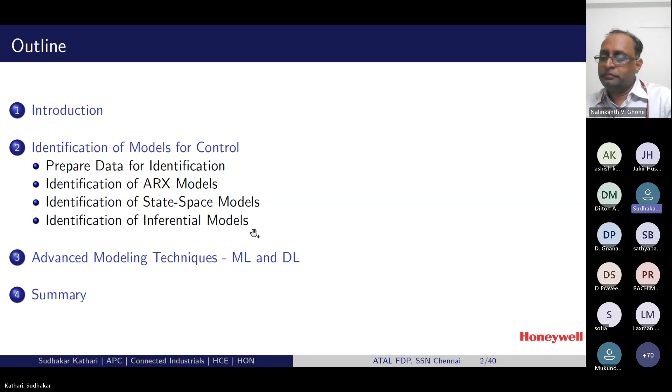The outline of the talk is as follows. First, I will introduce 3 different use cases of models. Then I talk about identification, where we will see the identification of 3 different models. And finally, I talk about machine learning and deep learning based modeling techniques, focusing especially on inferential applications in advanced process control.

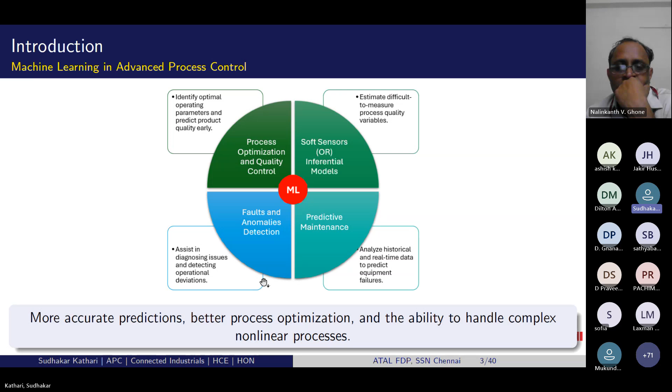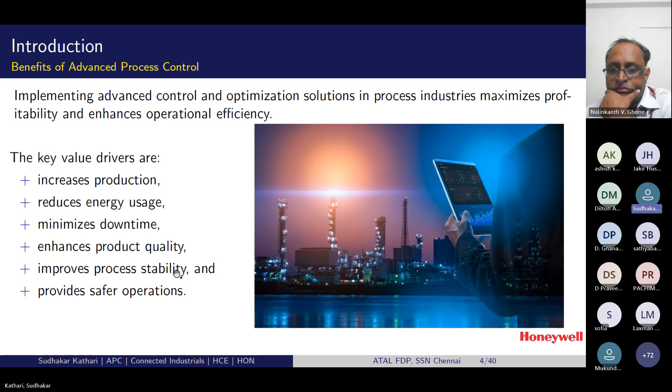If you talk about advanced process control, there are numerous benefits of implementing control and optimization solutions in process industries, including significant cost savings. Advanced process control solutions enhance operational efficiency, reduce energy usage, maximize profitability, and provide safe operations. These factors and key value drivers motivate process industries to adapt APC solutions in their plants.

The most common control strategy even today used in industries is proportional integral derivative control, a feedback single variable control. The output from the PID controller is a weighted sum of 3 factors: the error signal, typically the difference between the set point and the process variable, that is SP minus PV; the integration of the error; and the derivative, or rate of change, of the error.

For example, consider a tank system with a liquid. The objective is to maintain the temperature of the liquid at a particular value, known as the set point or SP. The temperature PID controller continuously reads the output temperature of the liquid and calculates the error, which is SP minus PV, and generates a control signal, which is the output from the controller. In industry, we use the notation OP. It generates this OP accordingly to maintain the temperature at the desired level.

The key step here is adjusting the weights, or tuning the PID parameters, according to the process conditions. There are different tuning methods based on process parameters. The typical process parameters are gain, time constant, and delay.

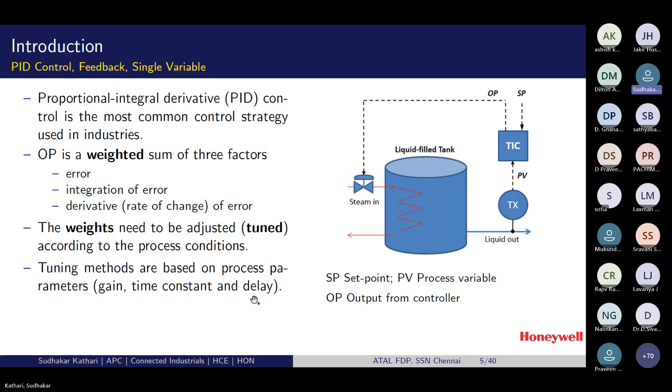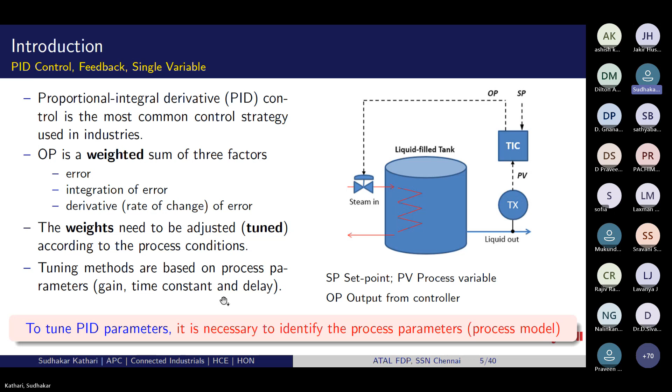So in order to tune the PID parameters or the weights of the PID controller, it is necessary to identify the process parameters. That means it is necessary to identify the process model, so that with the help of the model we capture the process dynamics. Once we get the process dynamics and the process model with the help of gain, time constant, and delay, there are different methods to adjust these weights.

Although the PID controller is the most commonly used control strategy, it has a few limitations. If you have a process and you step the input some value, the process will not start responding immediately. It will respond after some time. So that means the process may have some delay.

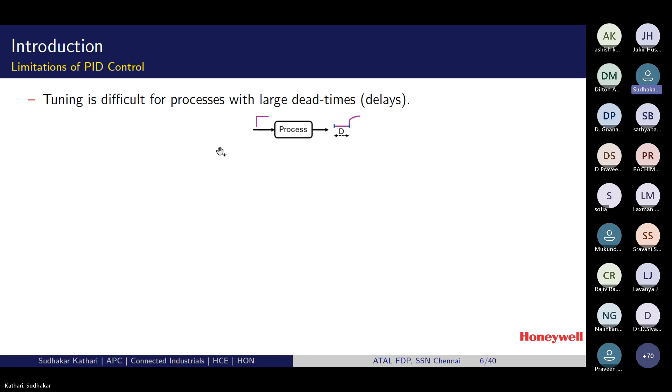If you talk about process industries, for example in oil and gas at refineries, you have larger pipes that connect the columns. So typically the delay could be in terms of minutes. It can go to some hours, 60 minutes or 2 hours, sometimes 120 minutes if it's a larger pipe connecting the column. So with the PID controller, it is difficult to tune the PID parameter for a process with large time delays, or we generally call it dead times.

The other limitation of the PID controller is difficulty handling or controlling a process with inverse response or unusual dynamics. The inverse response is when you step the process, it starts responding in the opposite direction to the normal behavior for some time, and then it starts responding as per the normal behavior. This is typically the inverse response, and it is difficult to control such processes with a PID controller.

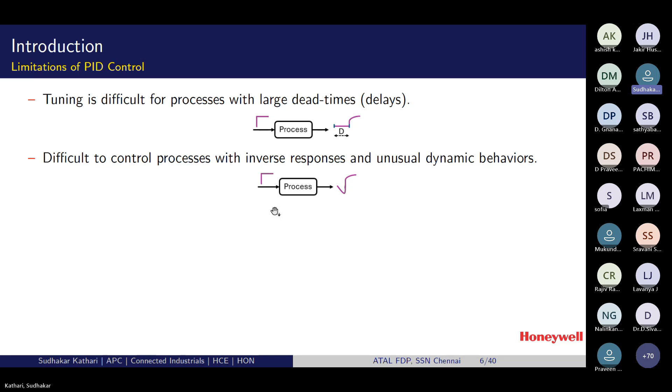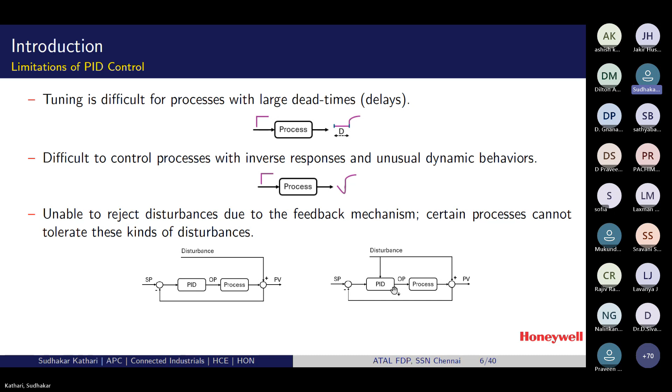The third limitation of the PID controller is it is unable to reject disturbances due to the feedback mechanism, as the disturbance is addressed only after the control action is taken. If you see here, the disturbance is added to the PV after the control action is taken. But ideally, we expect a feed forward kind of disturbance rejection, so before taking the control action, we account for the disturbance so that it can reject the disturbances.

The fourth and important limitation of the PID controller is it is unable to handle interactions, where many OPs can affect many PVs, when you have multiple control loops. It is also unable to handle constraints. So if you take a plant, we may need to minimize certain utility and maximize certain product.

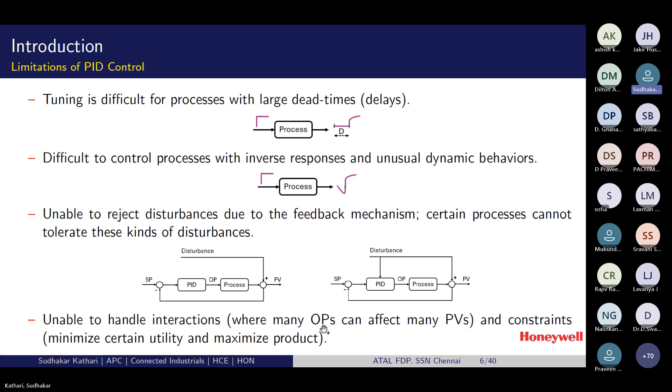To address these limitations, industries have adopted MPC based, that is model predictive control based, advanced process control strategies, which is typically above the PID control level. The basic four elements of MPC are: you need to specify the reference trajectory, and based on the reference trajectory and the dynamic model of the process or plant, it generates the prediction of the process output.

According to the reference trajectory and predicted process output, and with the given constraints, it tries to compute or generate the optimal movements in the inputs, such that it minimizes the error between the actual and the predicted output. So to implement these MPC-based advanced control solutions, it is necessary to identify the process dynamic model between the process inputs and outputs. This is another use case of model in process control, typically in the form of MIMO, multi-input multiple-output model.

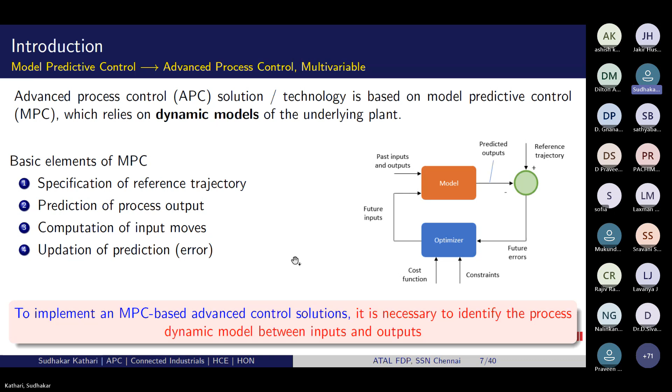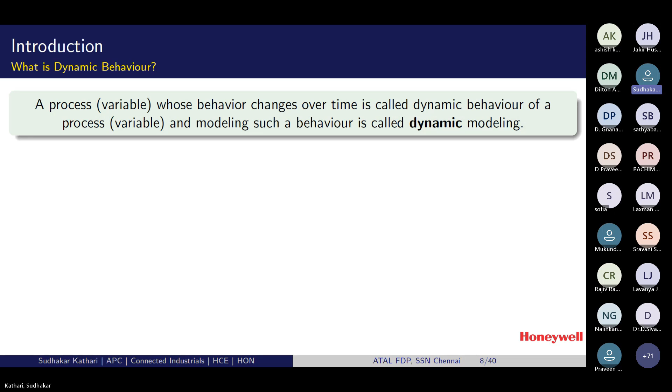So here we're talking about dynamic models. The MPC and PID controllers both completely rely on dynamic models. So what is a dynamic model and how do we incorporate it? A process variable whose behavior changes over time is called the typical dynamic behavior of a process, and we need to model such kind of behavior. We call that kind of modeling dynamic modeling.

So how do we incorporate the dynamics? For example, let's consider the inputs here: we have inputs U1 to UM, and the output is Y, considering only one output and multiple inputs case. This is a typical mathematical model that represents inputs and outputs in a static manner. If you see the expression, there is no time factor here, whereas dynamics means we need to bring in the time factor.

So the behavior of the process over that time. There are two ways we can incorporate the time factor, or the dynamics, in the mathematical model. One is dynamics in the input variables. Generally the output depends on the past inputs, so you need to bring the lag terms of the inputs. U1 runs from K minus 0 to K minus P according to the process order. Similarly U2 for the second input, and similarly for the mth input. So this is how we can bring the dynamics in the inputs.

So what is the effect of your output over the changes in the input over a particular period, starting from now. Standing at now, you can apply the last 1 hour, 2 hours, 3 hours, depending on your process conditions. That much past you have to go back and apply to see the effect of the past inputs on your output. That is how we capture the dynamics due to input changes.

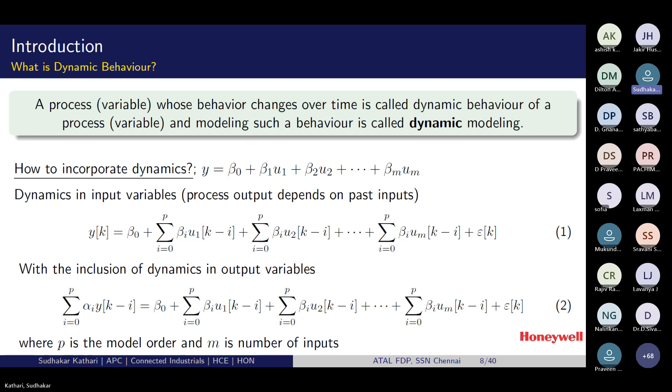So we have seen two use cases of models so far, and the third use case is measuring process quality variables. As I mentioned, one application of machine learning algorithms we recently adapted is the soft sensor inferential model. In a typical process industry, to implement any control and optimization solution, it is required to continuously measure the key process quality variables and properties, which are generally not possible to measure with physical sensors. For example, kerosene sulfur, product recovery, gas oil density, or Reid vapor pressure - these are typical process quality variables and properties.

So these kinds of process variables we can't measure continuously, that too according to the controller frequency. Typically the controller frequency could be 1 minute or 30 seconds depending on the process conditions, but it's not possible to measure these at that frequency. So the generic approach in typical industries is that the engineer collects available measurements of variables related to the particular process quality or property variable, and tries to bring some kind of mathematical relation to get that process quality or property variable.

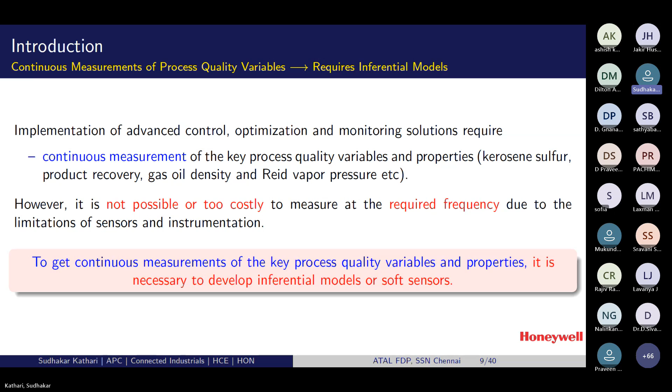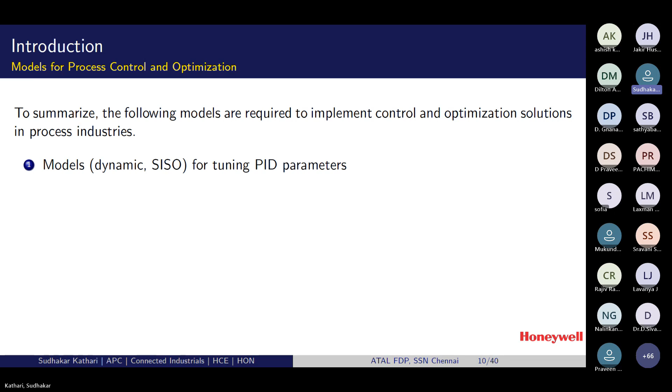So to summarize, three types of models are required to implement advanced process control and optimization solutions in process industries. One, models which are generally in dynamic form and SISO - single input, single output - for tuning PID parameters. The second use case is models which are again in dynamic form, especially in a MIMO structure, for implementing model-based advanced control and optimization solutions. And the third use case is models which can be either static or dynamic.

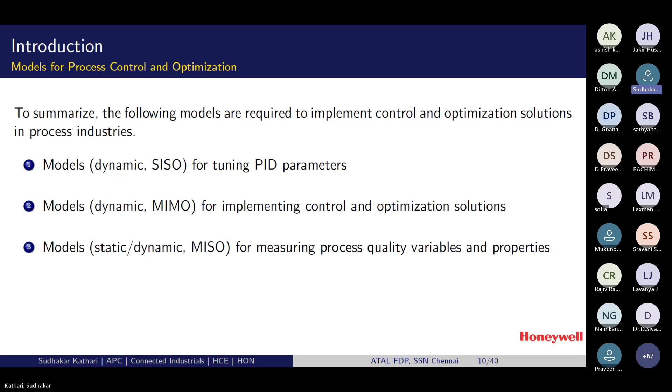If we talk about inferentials, sometimes the quality or property variables do not change with respect to time, so for certain cases a static model is sufficient. For other cases, we may require to incorporate dynamics to capture the behavior so that you get better accuracy of the model predictions. So the third use case is models either in static or dynamic form, specifically in MISO structure, for measuring process quality variables and properties, which we call soft sensors or inferentials. So there are three kinds of different models.

So how to identify these models? There are two approaches. One is the first principles approach, which uses physical laws and conservation equations. To build these first principle models, we require a good understanding of the physics of the process, which is rarely available for a large class of processes. Whereas the second, alternative approach is the data-driven approach, which uses experimental data. We perform experiments, collect the data, select a model structure, and estimate the parameters to try to capture the dynamics of the process with that model structure.

Identifying process models from measured data is one alternative. I have a natural question - can we integrate both these approaches into a single model? Yes, correct, we can integrate them.

If you have some prior knowledge about the process, you can bring that knowledge to build physics-based mathematical models, and also use experimental data. Both can be fed to the machine learning models together - it depends on how you plan to use it. If you know some information about the process, you can bring that into the model structure you're building from data. So that means you know a partial amount of the process, and the remaining portion you estimate from the data.

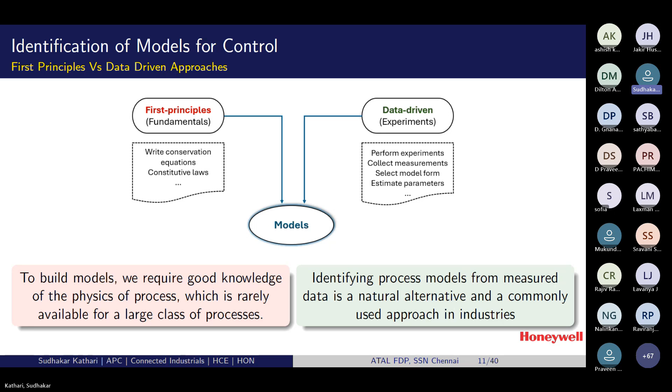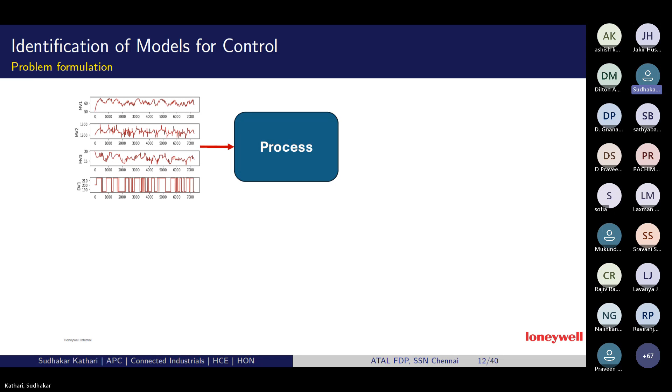The widely used and commonly used approach is the data driven approach. The identification problem in data driven approach is as follows: we have the process, we excite the process by stepping the inputs—this is typical in industries—then we measure the outputs. The inputs we call manipulated variables, represented as MVs, and the outputs we call control variables, represented as CV.

From this input and output data, we need to identify what are known as step response models. This is the step response model generally used in industries. However, it is difficult to obtain good step response models directly from the input and output data due to different reasons: noise, unmeasured disturbances, and the process may be running in closed loop.

Due to those reasons, we can't exactly get accurate step response models. So therefore, we first identify from the data a generic form of higher order models—could be in any form. Then we bring that generic form to a specific form, reduced order models, since we use lower order models for control. You can use any generic higher order model form to capture the dynamics as accurately as possible from the available data, and then approximate that higher order model to bring it to a specific reduced order form.

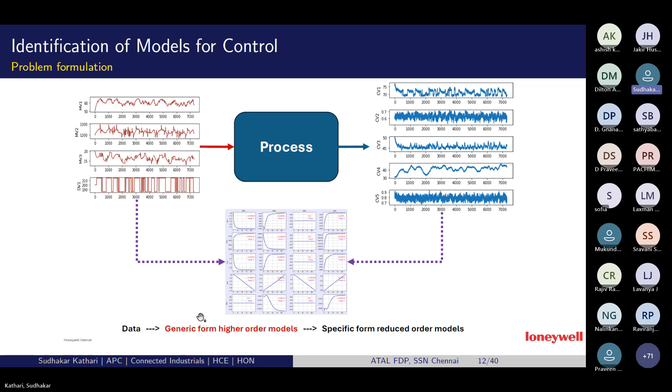So what are the typical model structures generally used for this generic form of higher order model identification? The model structures commonly used are the transfer function form and the state space form models. This is the general description of transfer function form models, especially in polynomial form, where y is the output of the process, u is the input, and ek is the noise.

Here B by F, in polynomial form, this is the plant model, and C by D, again in a ratio of polynomial form, is the disturbance model. If you observe here, A captures the dynamics common to both the plant and disturbance models. So depending on the polynomial values you assign for A, B, C, D, F, you arrive at different standard model structures that we use in process industries.

So these are the model structures. The FIR, a finite impulse response model structure—if you keep these things as ones, you need to identify only the B polynomial because all the remaining four are one. You just need to identify B, so you get what is known as a finite impulse response model.

That is one of the widely used model structures in industries that gives better results when the data is from open loop conditions. And the ARX model structure, autoregressive with exogenous inputs—these three are one, you need to identify only A and B, these two polynomials, from the data. And similarly, the ARMAX and OE, it is output error model structure, and Box-Jenkins.

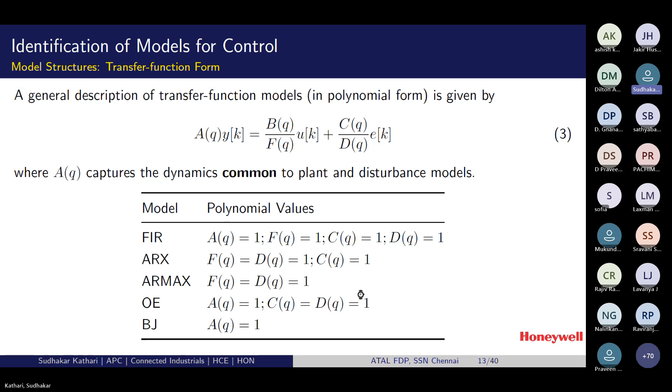The other model structure that is also widely used in process industry these days is a state space model structure. This is the general state space model form. You have the inputs U and output Y. You see another variable here, X, which we call the intermediate variable or state, which are generally hidden in the process.

For example, if you take a simple liquid level system, this is the input flow rate and output flow rate. These two are measured. If you consider the rate of change of volume, dV by dt, this we generally don't measure. That is the state of this liquid level system, which is generally a hidden variable. If any state is being observed or measured, that becomes an output.

So these are the matrices. Many might know these as the state, input, output, and direct feed-through matrices. Here the objective is to identify the state space matrices A, B, C, D that capture your process dynamics. Although we identify the state space model form, from the user perspective...

Typically the engineers are comfortable interpreting the models in transfer function form. So although we use the state space model structure internally, we need to bring it back to the transfer function form. You can use the mathematical relation that gives the relationship between the transfer function form and state space matrices to get the transfer function model. Once you get the transfer function model, that is generally shown to the user to interpret. So these are the two model structures.

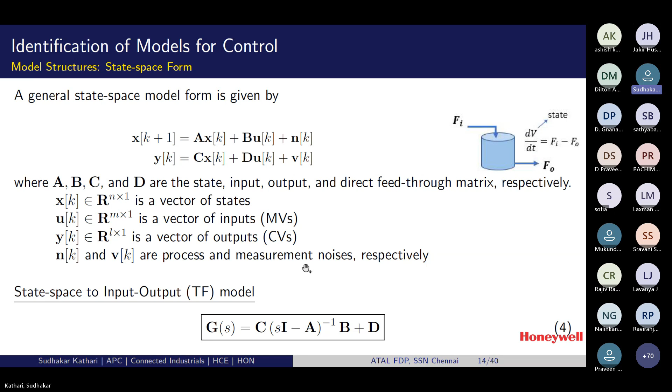Again, in the transfer function form, we have another category of different model structures. But before proceeding with identifying these model structures, we'll see what are the possible issues typically encountered with industrial data. These are the possible issues with industrial data that we need to handle before proceeding with the identification of the model.

Oversampling: if the data is sampled faster than needed during the step test, which the operator or engineer performs, this faster sampling leads to larger data length, which increases the computational time during identification.

And the offsets and different engineering units. Offsets are nothing but non-zero means, and identification algorithms are sensitive to these non-zero means and units. So we need to handle such things as well.

Drifts, trends, and disturbances all affect model accuracy, including unmeasured disturbances. Disturbances can be non-stationary, showing some kind of random walk behavior. So we need to handle such things as well. This is with respect to the data.

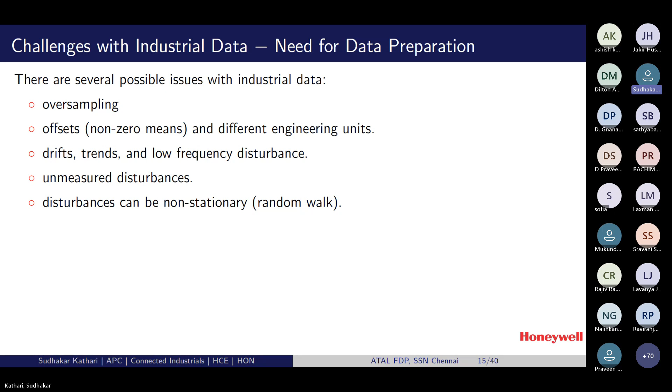If you consider the process itself, you may have large and different input-output delays, that is dead time, or integrating type dynamics. All these issues we need to handle, otherwise they can affect the efficacy of any identification algorithm used to identify the model structures we just went through. So to handle this, we need suitable data preparation before identification.

The issue of oversampling we generally handle through data resampling, that is, decreasing the sampling rate by a user-specified integer factor. Data scaling takes care of offsets and different engineering units through data scaling. Drifts, trends, low frequency disturbances, and other unmeasured non-stationary disturbances we generally remove using an appropriate pre-filter, then proceed with the modeling.

Similarly, for special dynamics with large input delays, we estimate the delays between input and output and remove those delays as part of pre-processing, then do the identification. For integrating type dynamics, we difference the integrated type outputs. Once differenced, it becomes a self-regulating stable CV. Then we do the model identification and add a pure integrator as a post-step.

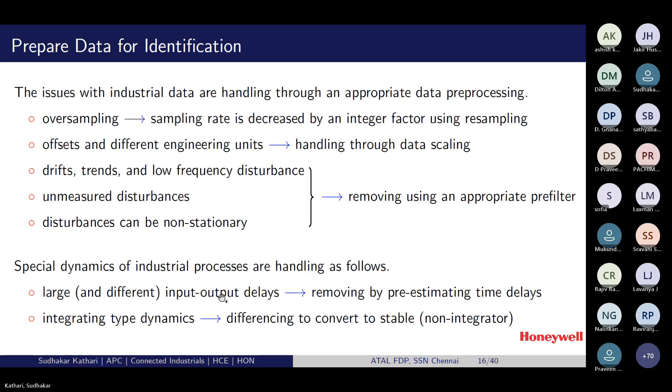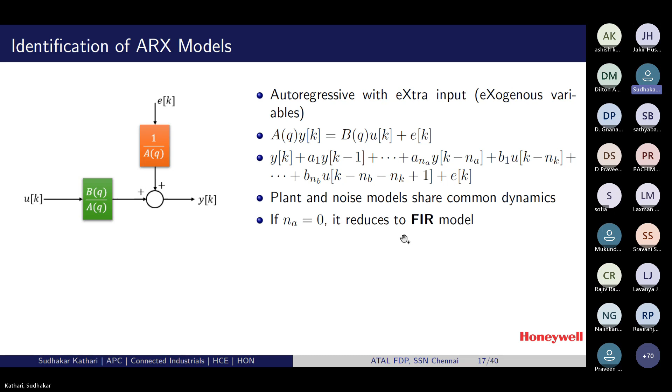If you see here, both the plant and noise model share common dynamics—A is common. Suppose if you make NA as 0, then it reduces to an FIR model. So both FIR and ARX can be identified using the least squares approach.

If you write the predictor for YK in terms of all lagged variables, you have unknowns. So it's a linear relation in terms of unknowns, and you can use least squares.

The problem formulation is: you have n measurements of input and output data of an unknown process. We need to identify the orders NA and NB of the polynomials and the delay.

Generally in the practical approach, we can't directly derive that order. So we have to try different orders, keeping some maximum order based on initial idea. For every order, you evaluate the loss function, and we pick the order which gives the minimum loss function.

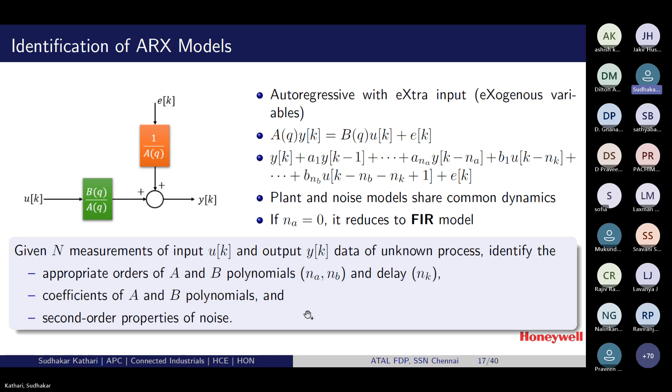Then we need to identify the coefficients of the A and B polynomials, and the second order properties of noise—that means the variance-covariance matrix of the noise.

As I mentioned, the predictor is linear in terms of unknowns. For the ARX model, the unknowns are A1 to AN and B1 to BN, and the knowns—also called regressors—are the past terms of both input and output. If it's an FIR model, you have only the past terms of inputs, and similarly the parameters B1 to BN.

We have a unique analytical solution: Phi transpose Phi inverse, Phi transpose Y. Using this least squares algorithm, you can identify the FIR and ARX models.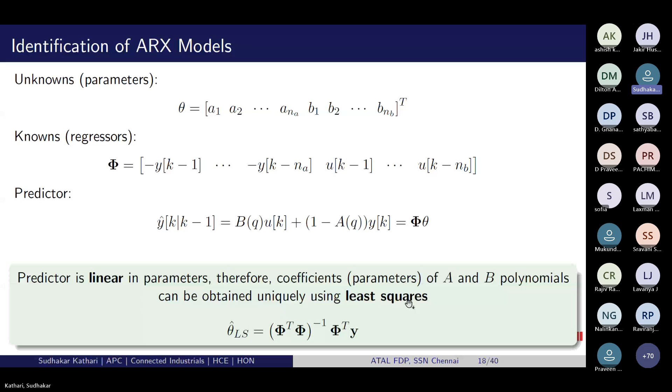We need to identify the model between OP and PV for a PID controller tuning. Each PID controller is a single variable controller, so we need to identify a dynamic SISO form of the model.

As I mentioned, as an intermediate step we use a higher order generic model structure, but at the final stage, for the end user, we need to bring it to a specific reduced order form. So we need to do some kind of curve fitting to approximate this higher order model's step response to a reduced order.

Any higher order process can be approximated with a lower order model with time delay. We can use two kinds of approximations, the most widely used being first order plus time delay and second order plus time delay.

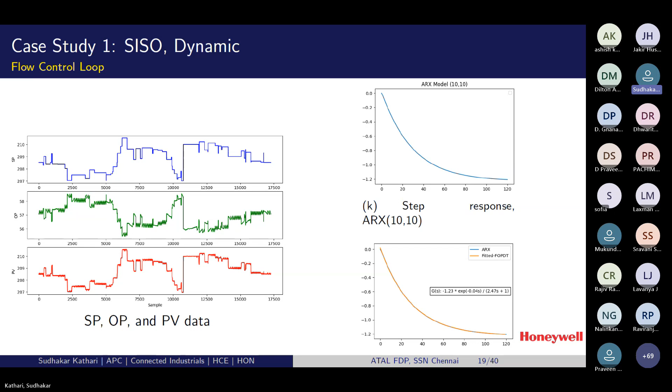So again, here we need to identify the order, which is typically the number of states we represent with n, and the state space matrices we need to identify, along with the second order properties. To identify such kind of a state space model structure, we use what are known as subspace identification methods.

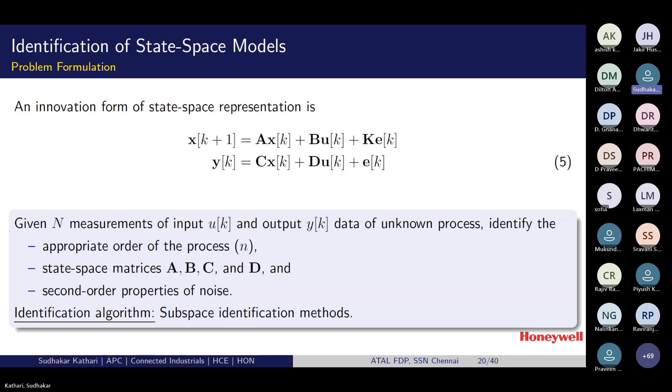To use any subspace identification methods, generally those algorithms are based on an extended form of the state space representation. The main purpose of any model is to make predictions using the available past input and output data and also the future knowledge of the input. That's why in state space representation, we extend these input, output vectors, in terms of past and future data matrices.

Accordingly, we have the past output input data and future input and future output data. Here, as a user, we need to choose two parameters: how much past you need to look back, and how much future you need to consider. Based on these two parameters, you get what are known as the data matrices. Once we have the data matrices, then we can extend the state space model, and you get what is known as the extended state space model.

If we see this extended state space model, X is also unknown, and Y has C and A matrices, which are also unknown. Typically, if we see the state space representation, A, B, C, D are unknown. Here you know U, so only B and D are unknown - these are in linear relation in terms of unknowns. But here, A is unknown and X is also unknown, so the product of two unknowns is nonlinear.

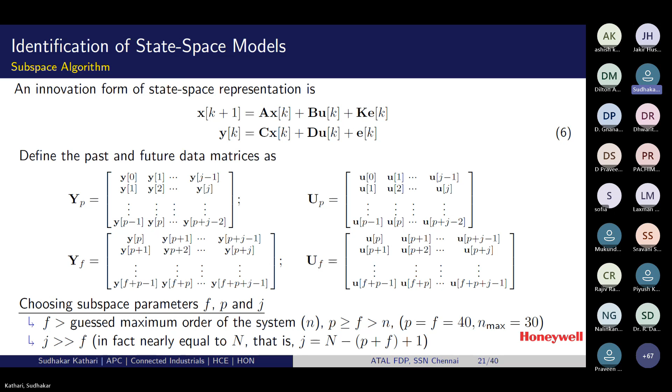So to identify the state space model using subspace algorithms, either the knowledge of the observable matrix, OF, or the state XK, is required to identify the entire state space representation. There are different approaches, different variants of subspace algorithms available to identify these, and then proceed with complete identification of the state space representation using least squares. Some are based on identifying OF and some are based on identifying the states.

Many are based on identifying the states. Generally, many people also prefer this second approach - they identify the states, then they estimate A, B, C, D together using least squares. You can refer to the literature for various algorithms - there are numerous algorithms, numerous variants to identify the state space representation.

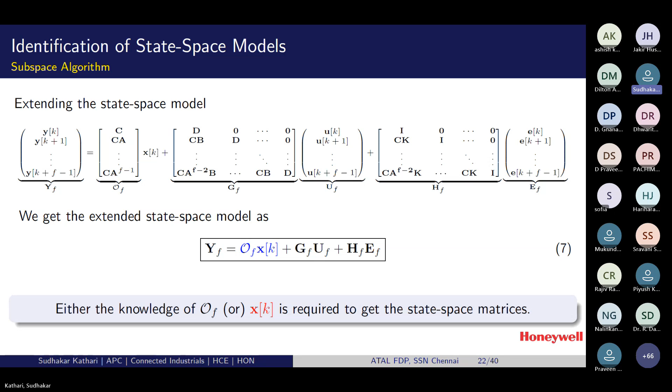This has all kinds of various flavors. CV4 has an integrator, and CV5 has large delays, and DV1 is a kind of disturbance variable, but it is measured - once we measure the disturbance variable, we include that in the modeling as well. Whereas DV2 is unmeasured and a random walk kind of disturbance variable. So it's unmeasured, meaning we do not have that variable's data. Generally we don't model it, but we need to consider its effect while modeling the other variables.

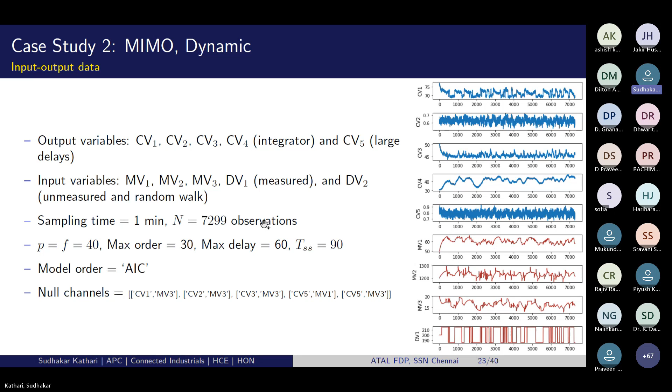We are not required to identify the model; we need to indicate that there is no model between that pair of input and output. So these step responses are from the higher order models. Once we have the higher order models, we need to get the specific reduced order model form for control and optimization. For implementing advanced control, generally in typical industries, we go until the third order, whereas for PID tuning, we either use first order plus time delay or second order plus time delay kind of approximation.

Once we get that kind of models, the expectation from the user is also that we need to quantify the quality of each submodel. Generally we can quantify the quality per CV per output, but we need to quantify the particular submodel quality. Generally we need to rank them as well, from rank 1 to rank 5.

So generally for control, the user uses the rank 1 to rank 3 models. If the particular submodel is rank 4 or rank 5, the expectation is the engineer or operator redo the step test, considering only the particular MVs by keeping the other models as ideal, redo the step test, collect new data, and again redo the identification to try to get better models for those problematic or poor quality submodels. That is how the dynamic models play an important role in implementing control and optimization solutions.

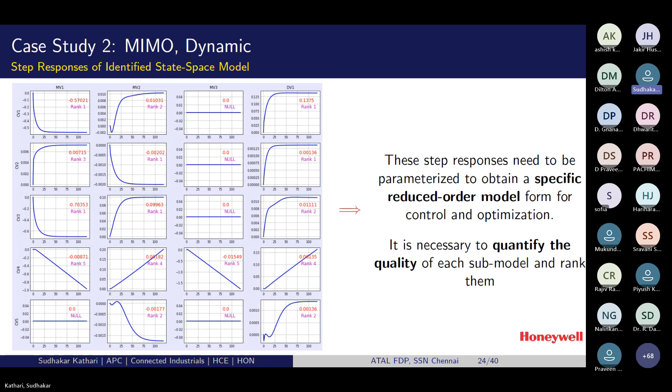The third use case of model, again required for implementing control and optimization solutions, is to build a soft sensor or inferential model that relates your input and output variables, and deploy that model to continuously measure or predict those process quality or inferential process quality or property variables according to the controller frequency.

Typically, we have the lab data for the target variables. With the available lab data and the available continuous input data, we need to map the corresponding sampling intervals, get the overall combined data, and then do the modeling.

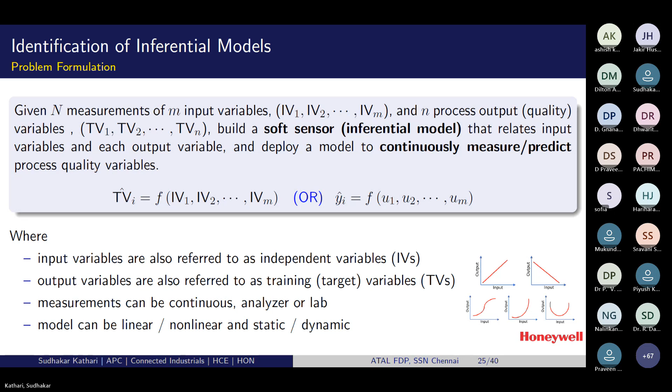To identify that kind of models, the model structure generally, the most widely used model structure is the linear and static form. We have seen this earlier as well. To identify such kind of models, these are the most widely used modeling techniques in industries: ordinary least squares, generally linear and appropriate for equal error variance in data; weighted least squares for unequal error variances; partial least squares for correlated input variables.

And nonlinear least squares to capture the nonlinear models. Again simpler ones, you can capture simpler exponential or logarithmic kind of nonlinear relations. If you want to capture complex relations, you need to consider the appropriate nonlinear function, which is generally difficult to get. So if you know the data, prior knowledge, error variances, you can pick the corresponding algorithm, which are theoretically proven to be effective for such kind of scenarios.

If you do not know, generally that is the case, we do not know much about the process in most of the scenarios. So the expectation is the user tries different algorithms listed here and picks the model which gives a minimum loss function, that is minimum mean square error.

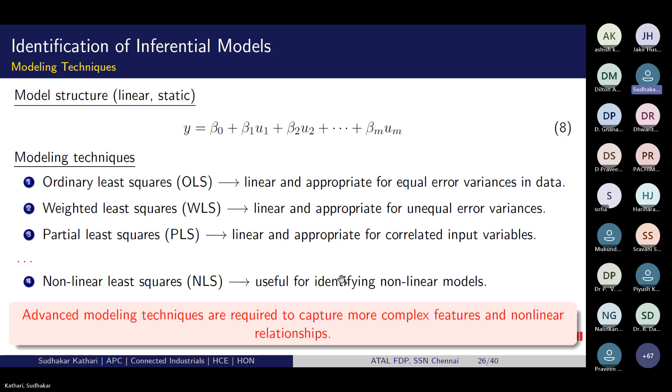So if you talk about these algorithms, it's mostly linear, and if you use nonlinear least squares, you can extend a bit to capture simpler nonlinear relations. Some applications may require capturing more complex features or nonlinear relationships, so that's where in industries we adapted to the advanced modeling techniques, machine learning and deep learning.

These techniques can also be used in building the MPC controller tuning models and also the models for implementing advanced process optimization solutions. But again, whatever model structure you use and whatever algorithm you use, the current expectation from the user is you need to bring it back to the step response form with the reduced model structure. So we have to see the way to bring that, otherwise we have to bring a completely new control strategy.

So we need to skip the MPC based control strategy. We need to come up with a new control strategy like RL based control strategy, so that we can avoid such kind of approximation.

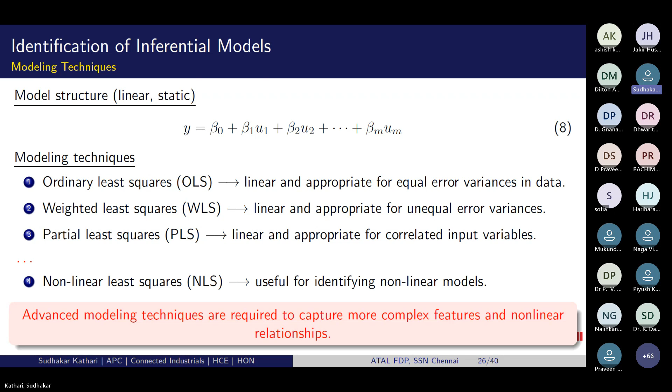Directly use machine learning and deep learning kind of model structures, generate the predictions, and based on the predictions, design a control strategy without using the MPC based control strategy. That is how generally we have to proceed. So here to focus here, the algorithms.

If we talk about the machine learning algorithms, this is how the evolution of tree-based machine learning algorithms, especially supervised and for regression. Started with the decision trees, kind of a flowchart of decisions based on certain conditions, and then bagging and random forest that selects the subsets of input random and build a collection of decision trees.

The other family is boosting. This is the bagging, a kind of a training mechanism, and the boosting. Boosting and gradient boosting and XGBoost. Here the random forest and XGBoost are the ensemble based methods which are widely used, since they are known to give accurate, more better accurate results.

So if you see the training mechanism, how the random forest works: it builds a number of decision trees on random subsets of the original data, and then averages the individual predictions to form the final prediction. That's why we are calling it an ensemble model. It averages the predictions from multiple decision trees, and then the average prediction is the final predicted value. This is a kind of parallel training, that's why we are calling it bagging.

If you talk about XGBoost, it's kind of a boosting algorithm, a sequential kind of approach. It builds a sequence of weak decisions. It builds one decision tree and finds the model error. Then in the next iteration, it tries to modify, tries to reduce that error with the modified version of the data. Then it combines all individual predictions to form the final predictions.

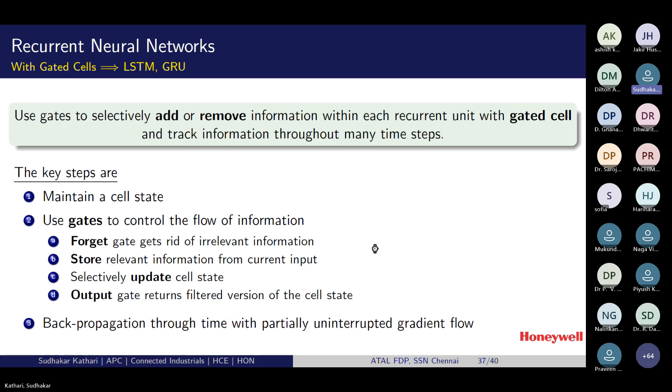So to demonstrate these algorithms along with the traditional approaches, consider an inferential application where we have the input, some number of inputs here. Mostly these are temperatures and pressures, and this is our output variable, which I think is from some demethanizer column. So we need to identify the most suitable kind of model structure here.

If you want to bring in the dynamics, there are two ways to do it. With machine learning algorithms, you can't bring the dynamics - they are always static form. Whatever model you identify using machine learning algorithms like random forest or XGBoost, they are all static model structures, and they are non-parametric. So you can't write any mathematical equation between input and output based on any machine learning algorithm - they are based on some training mechanism.

They are trying to learn or capture the relationship between the inputs and outputs. There is no model structure, so they are non-parametric - you can't talk about any parameters there. When it comes to deep learning, we have a kind of model structure that has unknown parameters, which are nothing but the weights. So our target is to estimate those weights that minimize the loss function such that the model form captures the relationship between the inputs and outputs.

So as I mentioned, if you don't use recurrent neural networks and instead use plain neural networks - the multi-layer perceptron or single-layer perceptron, that is single hidden layer neural network, or multiple hidden layer neural networks - they are all in a static form. Again, they are static model structures, and they can capture only the static relations.

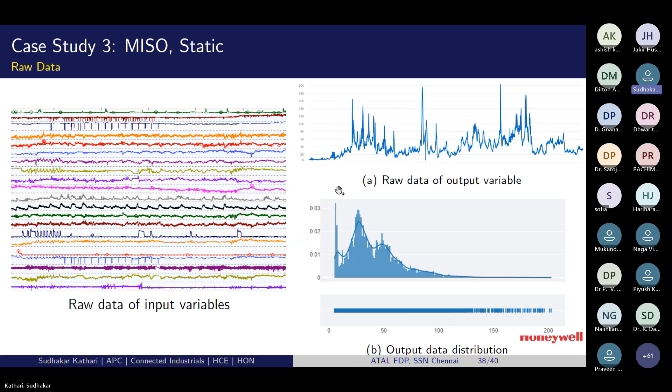Nonlinearity could be two ways: due to different operating conditions, or due to the process conditions. So we kind of need to predict or continuously measure this output variable data to feed that to the controller, so that the controller continuously takes action on the particular variable.

If we require to capture complex behavior, generally it happens in polymer industries or upstream, in wells and such where you may encounter significant nonlinear features. In such applications, if complex model structures are required, then we can turn to machine learning or deep learning kind of model structures.

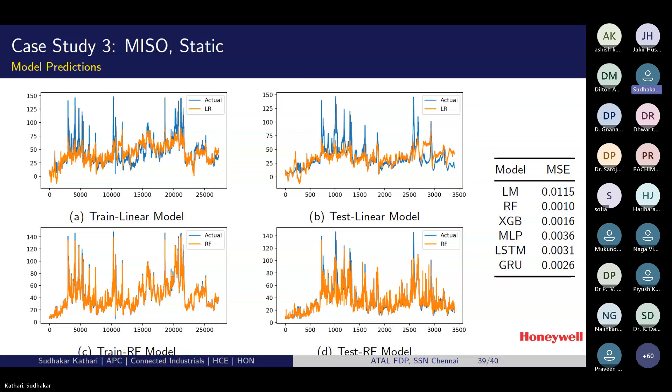Otherwise, simply deploying that model in the plant and it will not predict well means it will be a problem. At least we need to make sure it predicts the direction well. If the direction is opposite, then many things go wrong, as you are anyway aware of those things. So with this, I will summarize this session.

So to give some points here, what are the major developments that will emerge in process industries in coming days or years? The advancements in production automation - there is a lot of scope to automate production completely with advanced analytics and artificial intelligence that can lead to more reliable and safer operations.

And also the other thing is generation of meaningful insights to help operators and engineers optimize operational performance. That's where many users expect some kind of ChatGPT-like insights from analytics or tools that give guidance to the operator on where things are going wrong and what action to take to mitigate that. Such expectations are there from the users.

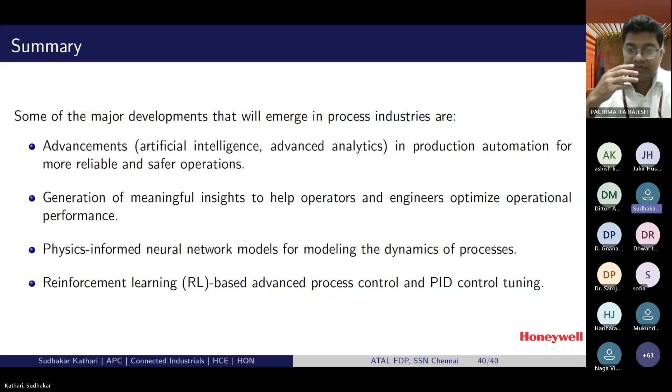And as Rajesh pointed out, physics informed neural network models for modeling the dynamics of the process - if there is scope, we need to bring the physics in terms of model structure inside the neural networks so that it captures the dynamics of the process well. Because as you know, if the complexity of the model increases, if we add too many hidden layers, then complexity becomes high, so we end up having too many weights.

We need to identify that many weights from the data. If we talk about the process plant, we may not have that much sufficient data, or we may have sufficient data but the quality may not be that good. So when you filter the quality data from a large pool, you end up having a small amount of data. In such cases, if you know some physics about the process and bring that in, we end up having only a smaller portion of the model to be identified from the data, which always benefits the model quality.

The other thing that some people are trying now, both in industry and academia, is reinforcement learning based advanced process control that completely eliminates the need for MPC based control. And the other one is PID controller tuning - although there isn't much scope from the business side, people are still looking into PID controller tuning based on reinforcement learning instead of the traditional model-based approaches we discussed.

So these are some major developments that will emerge in process industries in coming days, and some are already in the process of being explored.

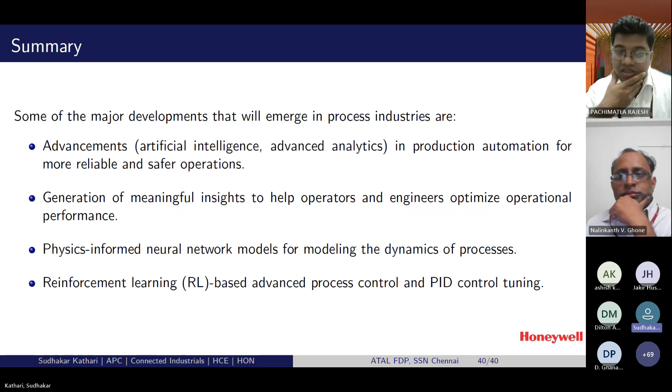What is meant by this physics informed neural networks? Are you giving input to the model, or are you using the physics based model for evaluating the model?

It's like if you have the process, if you know some part of the process. Suppose if you have some MVCV relation, if you know that the gain could be this much, you need to bring that information into the model structure, so that the resulting model generates predictions according to the gain that you input. It's like bringing the known information of the process.

In identification, there are three things. One is black box models, where you do not know anything about the process. It's like the process is completely covered with a black cloth. You just exert the input, give some step input, and measure the output. You have input and output data, and you try to identify the model from input output data only. That is black box model.

The other thing is complete knowledge about the process. Then you use the basic first principles or conservation laws to arrive at some kind of differential equations or partial differential equations. That is a model - any mathematical expression that represents the relationship between input and output. That is a white box model. There is no data; it's completely process knowledge that you are deriving.